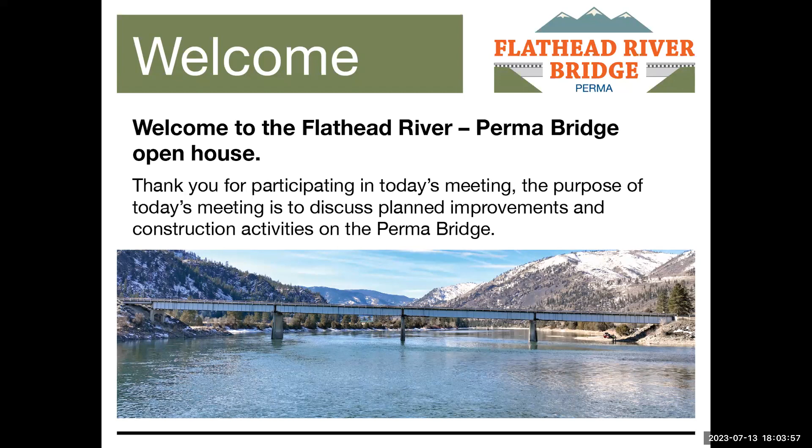And now I'm going to go ahead and turn the microphone over to Daryl Williams from MDT Missoula District. Daryl? Thank you, Brandon. Good evening, everybody. Like Brandon said, my name is Daryl Williams. I'm the District Construction Operations Engineer for MDT in the Missoula District, and I will be assisting our project manager, John Benda, who is also on the call tonight, with contract administration for this project.

MDT's mission is to serve the public by providing a transportation system and service that emphasize quality, safety, cost effectiveness, economic vitality, and sensitivity to the environment. MDT also maintains a staff with the resources and technical expertise needed to perform the workload for the majority of state transportation projects. However, when MDT does not have the resources or technical expertise in-house, we often hire consultants for specific project work. Consultants are just an extension of our MDT staff capable of providing additional skills, experience, expertise, and quality work without increasing our in-house staff here at MDT.

They are managed by MDT Consultant Design Bureau in Helena and work together with the MDT project team and management to help us deliver the project. This just happens to be the case on this project, as MDT has selected a design build team consisting of Morrison Maierle, Frontier West, and RBCI. Morrison Maierle will be the designer, Frontier West is the contractor, and RBCI is here to help out with public relations.

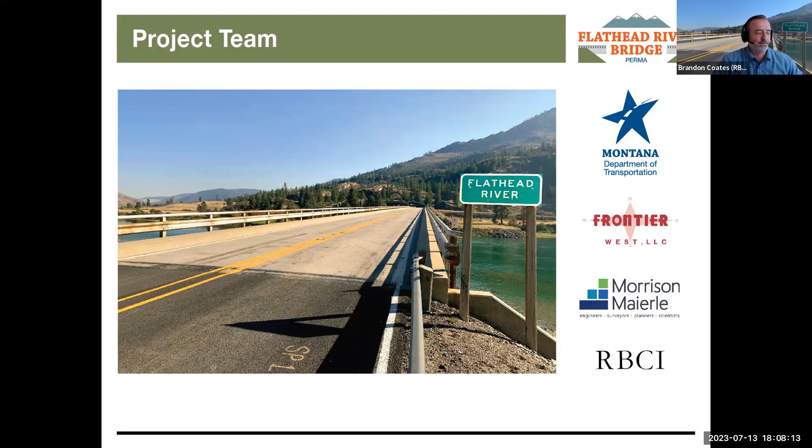Well, thank you. I'd just like to take just a few minutes and talk about MDT's Bridge Bureau and the services they provide. The MDT Bridge Bureau is tasked with keeping Montana bridges safe, resilient, economical, and reliable. The Bridge Bureau is organized into 2 sections: the Bridge Management section and the Bridge Design section.

MDT's Bridge Management section will provide condition inspection and load rating evaluation for over 4,500 public bridges in the state. These include counties and city-owned bridges. The Bridge Management section also evaluates and analyzes overweight permit loads and performs bridge maintenance on state-owned bridges.

Now, the MDT Bridge Design section provides design and engineering management on bridge replacement, rehabilitation, and preservation projects. The Bridge Design section will also establish and maintain design criteria and standards. They'll participate in research projects and also promote design initiatives to improve bridge performance and value.

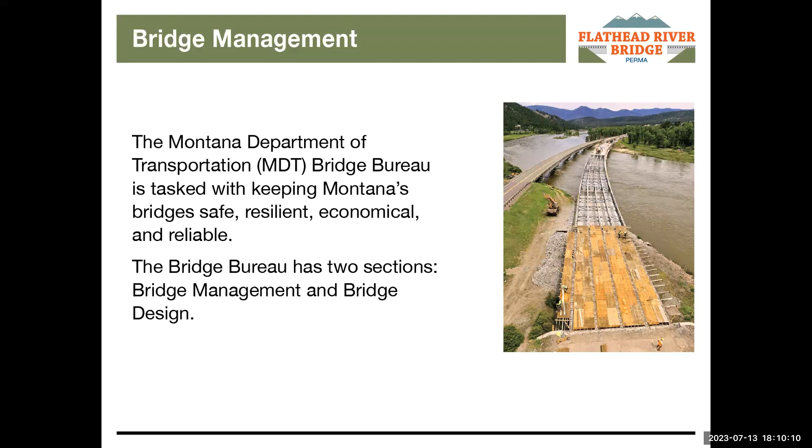Hey, thanks, Daryl. So MDT is rehabilitating the bridge that carries Secondary Highway 382 traffic over the Flathead River near Perma. The bridge is a 5-span, 653-foot-long bridge. The bridge was originally constructed in the early 1960s and needs repairs. Beth Kappas will get into the specifics of those repairs that will be completed on the bridge after myself.

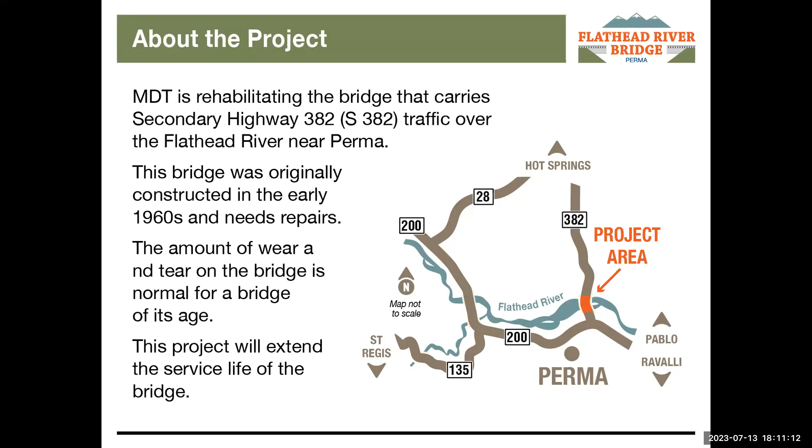The amount of wear and tear on the bridge is normal for its age. The bridge is currently safe to drive on. MDT is completing similar bridge rehabilitation projects around the state that have similar aging issues. This project will extend the service lives of the bridge. Next slide.

MDT has partnered with Frontier West and Morrison Maierle to evaluate and develop plans for the needed repairs and construct the improvements that will extend the life of the bridge. The project is being delivered through a method called design build delivery. This delivery method allows the design engineer and the construction contractor to collaborate on the design and construction. MDT often uses this process to expedite the development and construction of a project. This project was also a good fit for design build because the collaboration between design and construction staff promotes innovative methods for the repairs.

The Frontier West Morrison Maierle team was selected in March of 2023 through a competitive best value selection. The team hit the ground running immediately after award with design development activities. Some of those design development activities include field evaluations, alternative analysis, plan submittals and reviews, environmental documentation, and coordination with local agencies. This week, we are in the final stage of the design process and completing construction plans and documents.

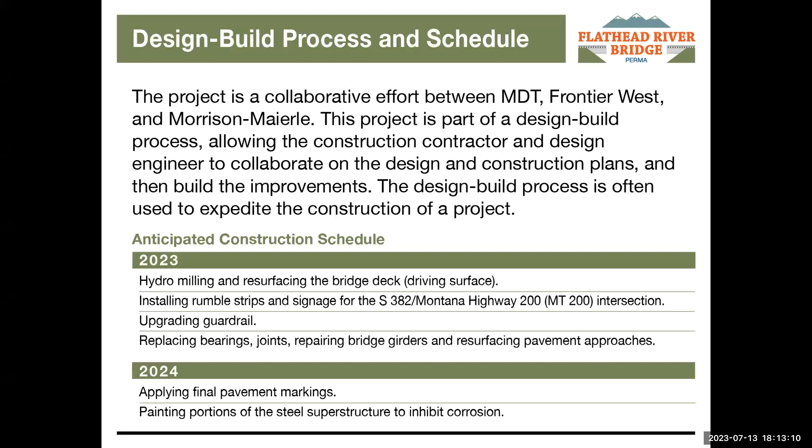As we turn the corner from design to construction, a handful of construction activities can be seen occurring in 2023 and 2024. The current schedule suggests that construction could begin as early as July 24th at the end of this month at the Perma location. Chris Anderson will be elaborating more on the construction schedule later in this presentation. Next slide.

MDT will communicate and coordinate with local officials from Sanders County and the Confederated Salish and Kootenai Tribes to ensure critical services will continue in the project area throughout construction. The project team will meet with emergency responders to ensure that any potential emergencies in the project area could be responded to in a safe and timely manner.

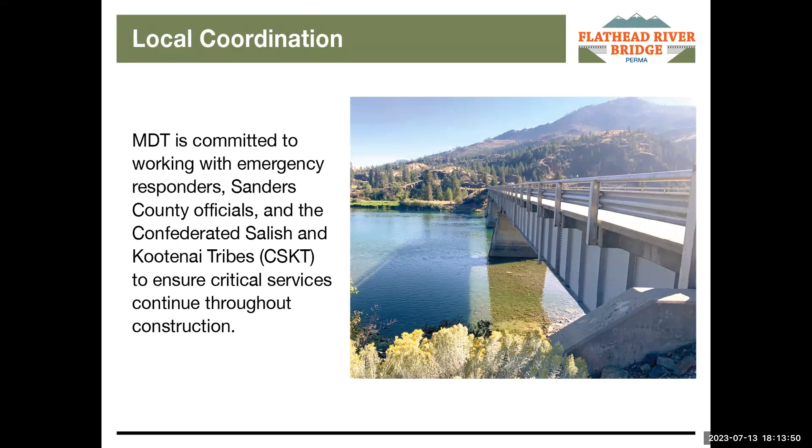Thanks, John. So this slide provides an overview of some of the planned improvements associated with this bridge rehab project. First and foremost, we will be replacing some underperforming bridge bearings that are out there and then also performing some girder repairs. And this is really the immediate need that spurred this project. So that's the thing we're really focused on as far as some of our goals here with this project. Aside from those needed repairs, there are a number of other rehab work items associated with this project.

We'll also be painting portions of the steel superstructure that are out there, and that's primarily focused at inhibiting and mitigating any rust and corrosion that's happening out there. So this is a steel structure. It was originally painted, and that coating just deteriorates over time, and rust can form on the bridge, which is not good for the structure. So we'll be refreshing the paint in certain locations that are more susceptible to corrosion. So you'll see that going on.

We'll also be refreshing the surface of the deck, or the surface of the bridge where we drive on that concrete deck. We'll be milling off a small portion of the existing concrete and replacing that with a new concrete overlay. We'll also be paving the roadway approach on both of the bridge ends. And then, really common with bridge improvement projects, we'll be replacing the rail across the bridge and then also the approach rail that runs along the roadway and ties into the bridge rail.

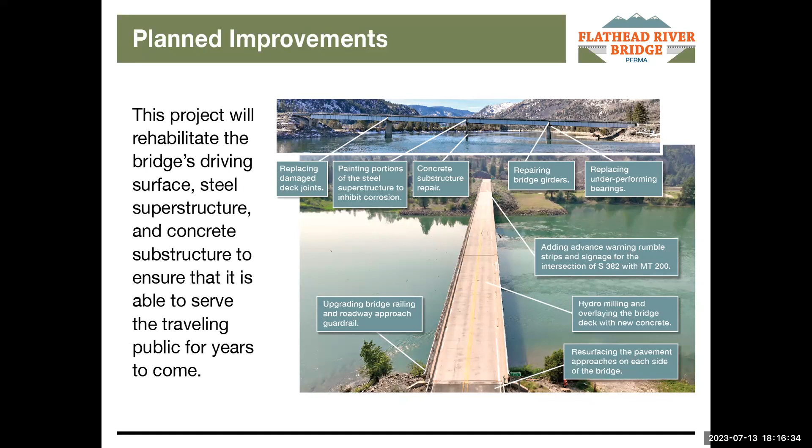And then it also creates a roughened surface that helps let that new overlay concrete adhere and stick to that existing bridge deck. And there are other methods for performing this like select demolition, but hydro demolition is a real benefit to the bridge because it allows us to remove that concrete without damaging the existing reinforcing that's embedded in the concrete deck that we want to keep. So a mechanical means of removal could damage that steel. So you'll see work like this going on out there over the next few weeks, and that'll definitely provide a big improvement to the ride of the structure.

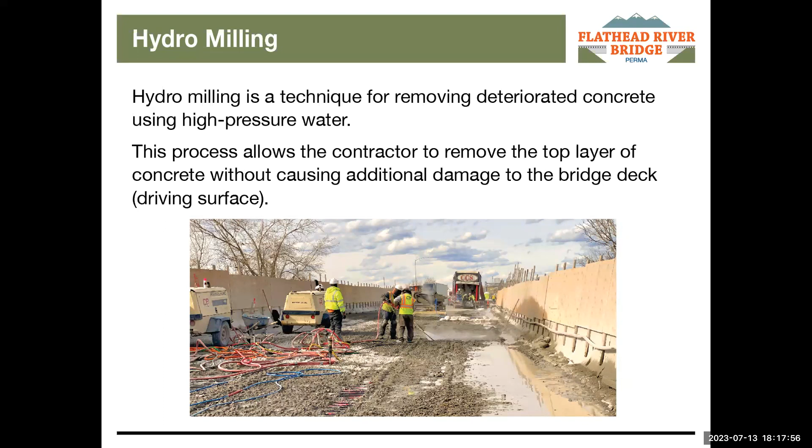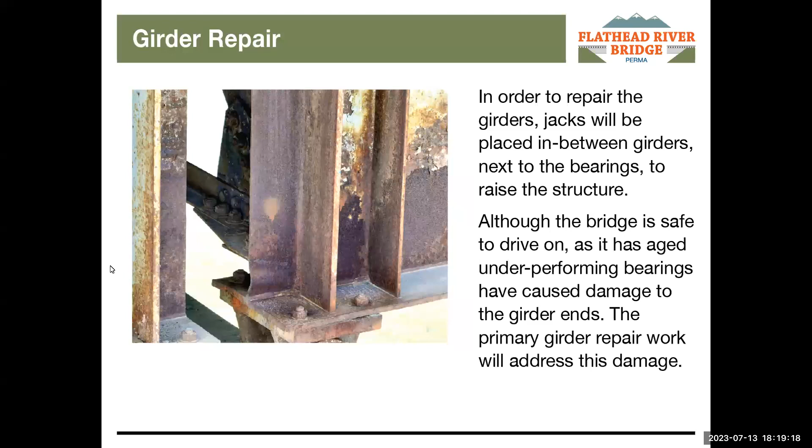And then I think the next slide kind of provides an overview of what's causing this. I think you see some damage like that, and it begs the question, why is this happening? So kind of maybe a lesser known fact about bridges is that they move and are designed to move. So the bridge bearings are a feature of a bridge that can accommodate that necessary movement. And there's actually a number of different things you'll see in bridges that can accommodate movement. Bearings are one of those major movement accommodating features.

So in this photo, the bearings are those large pinned devices that are made up of steel. And essentially what these do is allow the bridge to move by rotating and translating. And so it rotates about that solid steel pin in the middle. And then that backside bearing has a rocker plate below that allows for that translation. And so if we can accommodate this type of movement in the bridge, it really reduces the amount of stresses that bridge is seeing. So it's really beneficial to be able to accommodate that necessary movement.

And in this particular structure, the main movement that we're trying to accommodate is really just thermal shrinkage and expansion. So just as the ambient temperature in the air changes, the materials that this bridge is made out of want to expand and contract. And when you're talking about big, long spans, that type of thing adds up quick, and it actually is a sizable amount of movement.

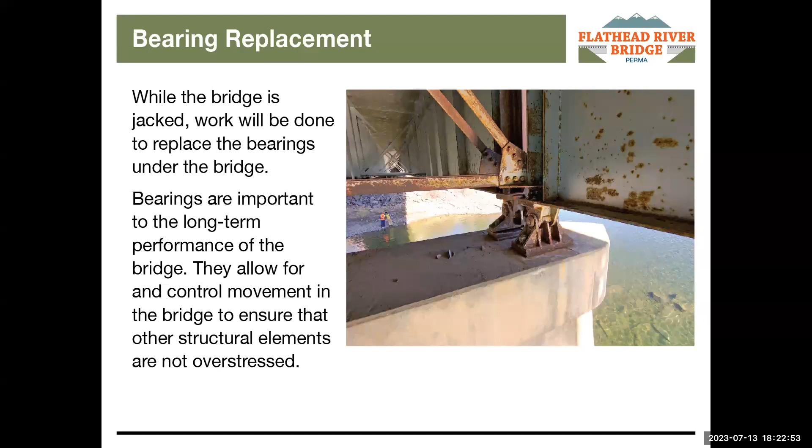We'll pull those out, complete our girder repairs, and then place the new bearings in and set the bridge back down. And so this is the construction operation that's really requiring the roadway closure. And Chris is going to talk a little bit more about what that looks like and when that's coming. But I think, as you can guess, eliminating the live load and that vehicle load from the bridge greatly improves the feasibility and safety of completing that jacking operation. Next slide.

So as with any transportation project, MDT and the project team go through a fairly rigorous process to assess the environmental considerations and constraints that are specific to the project. And NEPA and MEPA are definitely the guiding regulations in this environmental assessment, and there are a number of things that are considered. A couple of highlights related to this project. Migratory birds are definitely a factor. So essentially, we would really want to minimize our impacts to those animals.

And so you might have seen members of our construction team out on site already clearing nests from the bridge. And really, by deterring migratory birds from nesting on the bridge this season and encouraging them to nest elsewhere, it really limits the risk that they'll be impacted by this construction effort. So that's definitely an ongoing and continual effort.

Bull trout are also a threatened species that are native to the Flathead River. And our big goal to reduce our impact to that species and also to the waterway is just by keeping our construction operations out of the water. And so we're actually planning to build some, I would say, innovative falsework, where we are suspending falsework from the bridge itself so that there's no need to construct temporary supports or temporary access in the river. Again, this is all really aimed at reducing our impact.

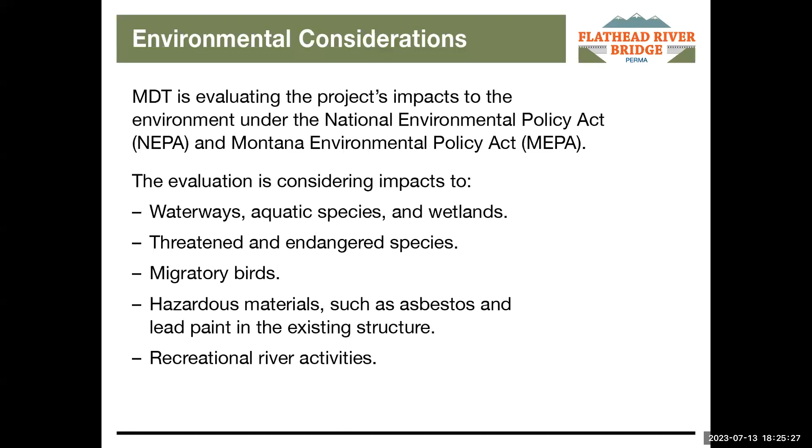However, for our project, we're planning to use a steel grit that is recyclable. So you'll see special equipment out on site that can process and clean that steel grit medium and reuse it. So we have far less material going to the landfill from that painting operation. So maybe with that quick overview of some of the things you'll see during construction, I'll turn it over to Chris to talk more about what to expect.

And as Beth said, right now we anticipate construction starting July 24th. We're right on pace right now to meet that date, but that may change a day or so as we work up to that. During work, there will be one-way travel through the work zone at all times. For the most part, Highway 200 will travel freely, and as traffic backs up on 382 on the north side of the bridge, we'll release traffic, and traffic will be stopped on 200 for short periods of time.

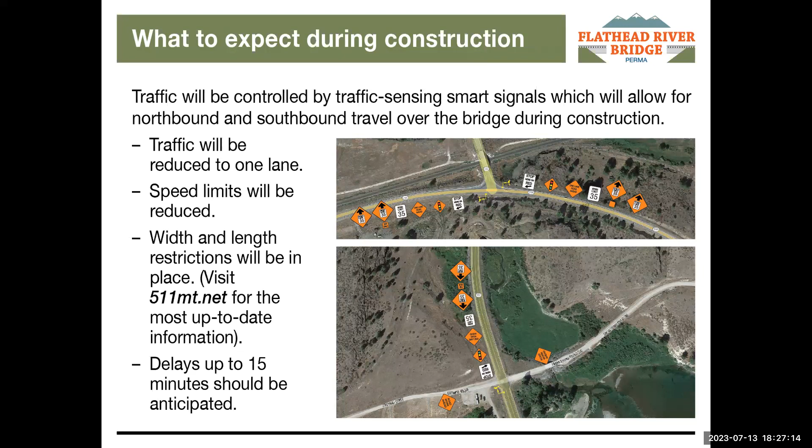We anticipate only one closure, as Beth said, for the work. Right now, that is anticipated to be late July, early August. I apologize. And that should only be a 1 weekend closure. For that closure, Beth had mentioned the jacking operations.

We need to add some steel members to the existing girders to make it able for us to jack it up to replace those bearings and fix the girders. After the bearings are replaced, we will move into our hydro demolition that she showed. That will be, like I said, 1 lane at a time. We will demo 1 lane. We will pour the new bridge deck.

After that's complete, once the bridge deck's cured, we will switch traffic to that side and hydro demo the other side. Once both lanes have a new bridge deck in place, we will replace the barrier on either side of the bridge. That'll be a 1 lane at a time operation as well. And along with the barrier rail, there is expansion joint work that'll happen after the deck's in place.

Finally, we will mill and repave the roadway once the final deck surface is in place. We'll wait to do that to the end. That'll allow us to tie into the new bridge deck elevation that's being raised by 1 inch for as smooth a transition as we can. And then guardrail will finish off the season.

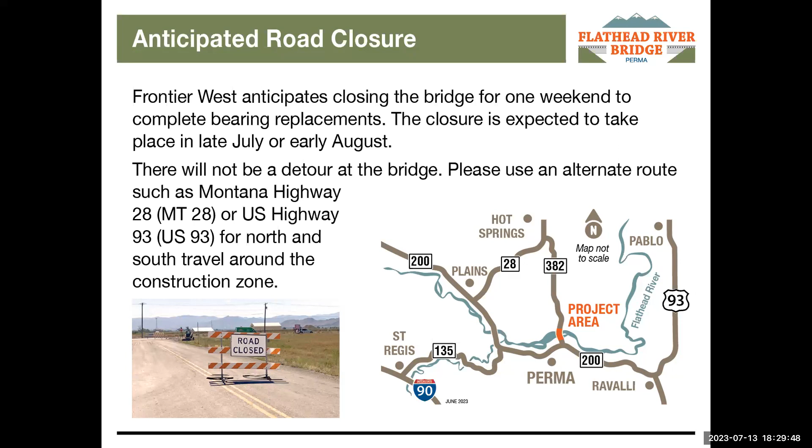And that recycler that Beth had mentioned that's going to recycle the media to remove the paint is required to sit on the bridge deck above the operations. And that obviously can't happen while we're doing other stuff. So that work is going to happen in 2024. And that will finish out this work for us on the bridge. And I'll send it back over to Brandon.

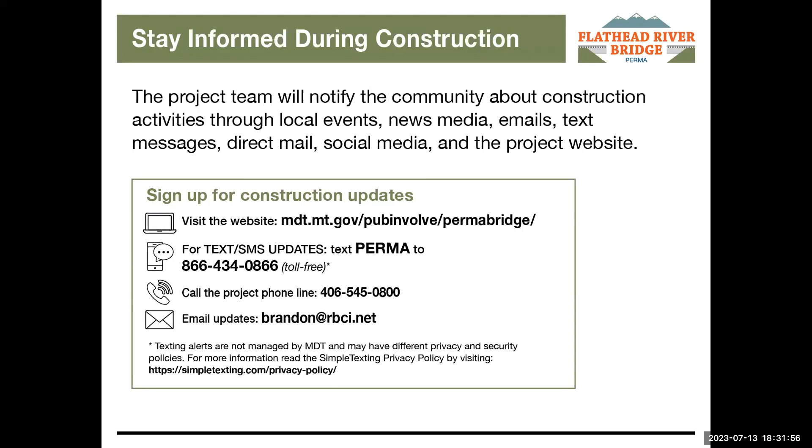And with that, we're at the conclusion of our presentation portion. So I'd like to, again, thank you for attending. Keeping the public informed throughout construction is very important to MDT, and that is our role in the project. We do have a project phone line, and that phone number is 406-545-0800.

So this is a good time now. If you have any questions, type those into the Q&A box and we can go ahead and respond to those. And if you don't have any questions, you are free to drop off from the presentation. Again, this is being recorded and we will post it on the project website next week as well. So thank you in advance for attending.

Tyler, do we have any questions yet? We do not have any questions at this time. One thing that you neglected to mention is that you can submit questions following this meeting. If a question comes up later, you are more than welcome to submit it to us.